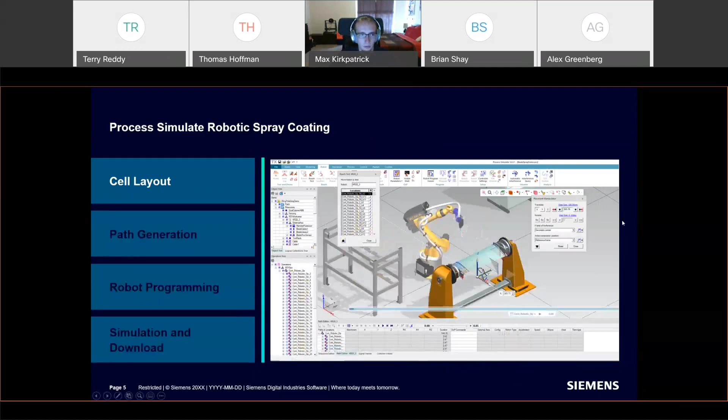First area I want to touch on is cell layout. This is mainly about determining where we should place our robot, our fixturing, how we should hold our work, and how do we determine that that's going to actually work the way we expect it to when we go to actually push this to the real cell.

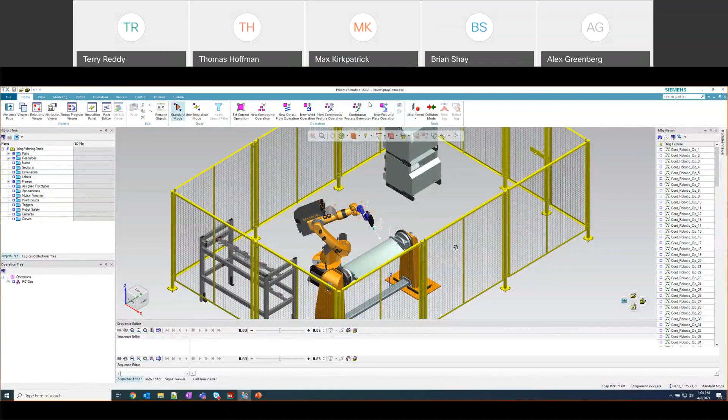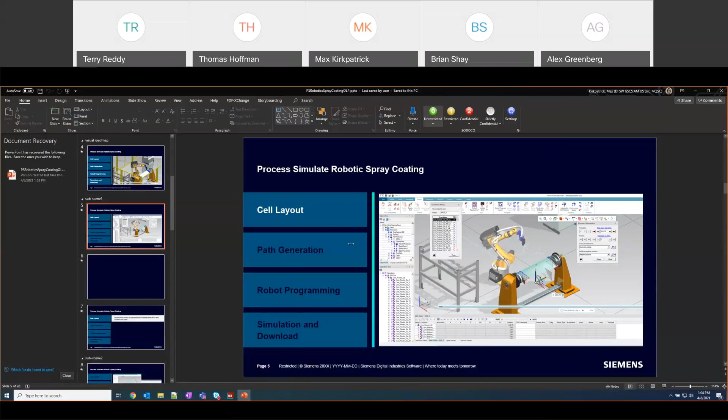So I'm going to jump into some live software here. This is the Siemens Process Simulate tool. See here. Having some technical difficulties here. It's rather slow. That's impressive. Twice in one day. That's okay. Just going to restart that real quick, and then I'll try to speed up here to see if we can't make up some of the lost time.

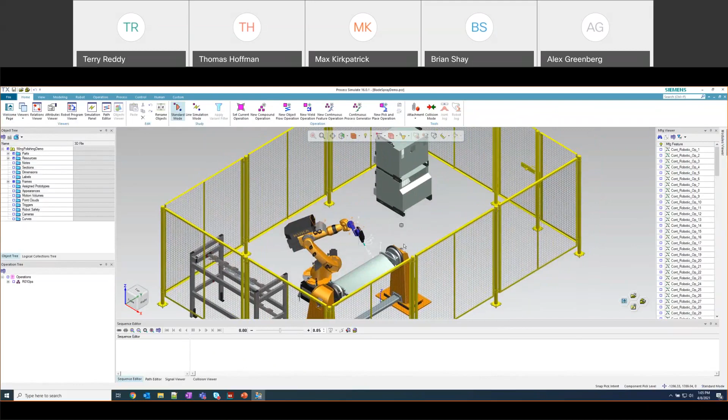Okay, so I'm just going to open back up the cell, and then we're going to get going again here. So first thing I wanted to talk about was cell layout. How do we determine where these fixtures and fencing and everything should be in the cell? One of the first things we can do is analyze how the robot is actually going to move around in the cell, using the inverse kinematics tools inside Process Simulate to understand how the robot will move in the space, how far it can physically reach if I start dragging around the end effector, and we can get a better understanding of what our robot reachability looks like at a certain height.

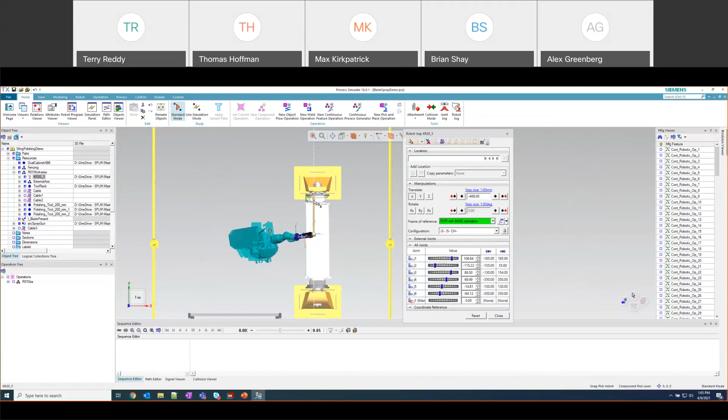But this is a sort of imprecise tool, so something else we might do is use what's called a reach test to do this. I could take a look at maybe this first pass of my spray coating application and the last pass, and then we can analyze whether or not these locations in these paths will be within reach of the robot. So I can take these two operations and then perform what's called a reach test.

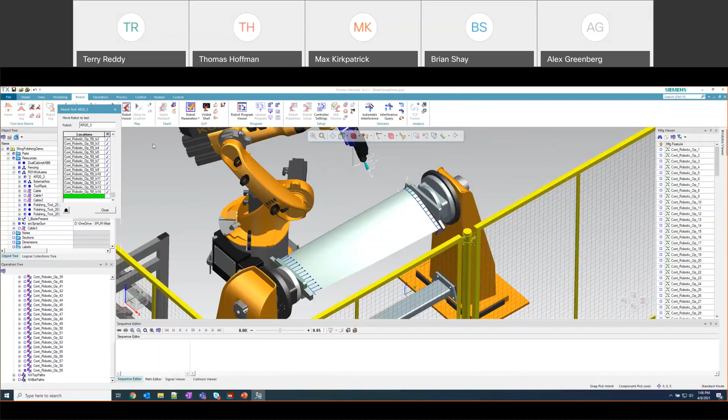So we'll do a reach test, and in its current location, the robot can reach all these targets. That's all well and good, because this is placed where we expected it to be.

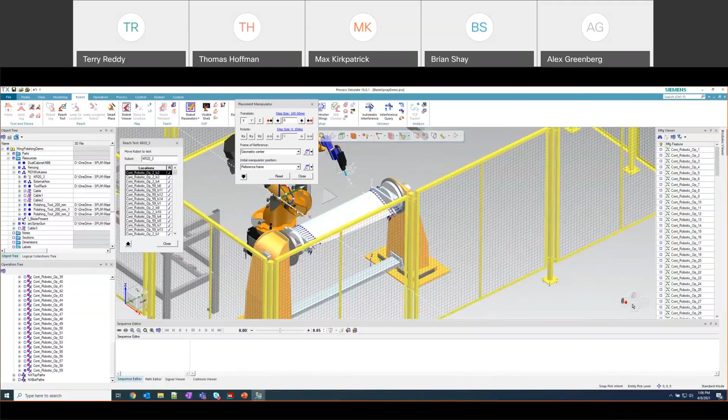If I go to try to move the robot while I'm doing a reach test, we'll see that the menu is actually interactive, and I can dynamically move the robot around. As I slide it farther and farther away from the fixture, the points turn from yellow to red, telling me that they no longer can be reached in the current position. This is because the robot physically can't get to that location.

This isn't taking into account the rotary positioner. So if we wanted to analyze whether rotating the positioner would still get us there, we could do the same thing. We could pull up this rotary positioner and rotate it to a new position. We go here, joint jog, move this to a new target, maybe something like this. And then we can do the same reach test and see if we can reach those targets now.

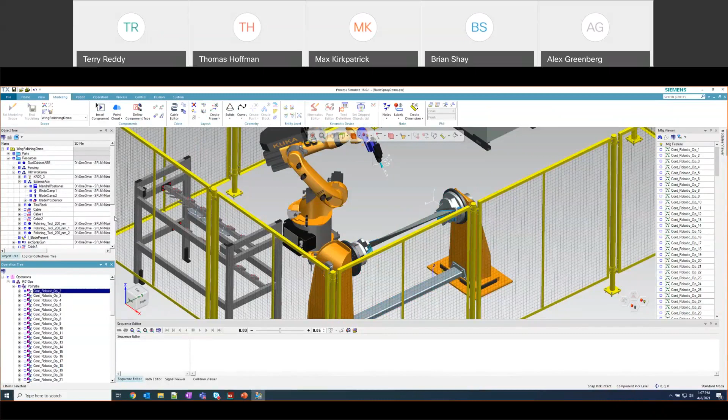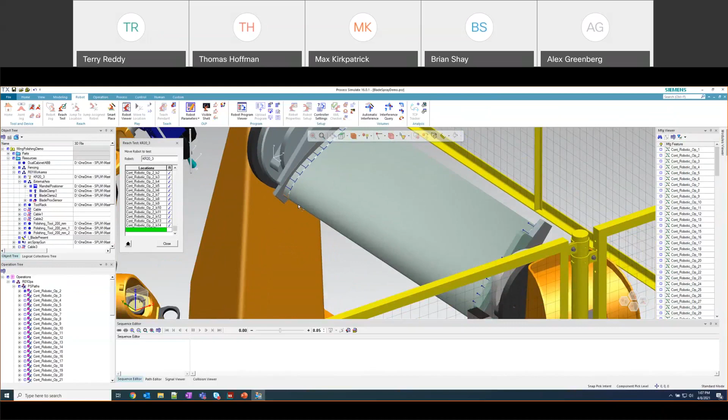In this position, looks like we can get everything except now we can't get the front leading edge of the blade—it's a helicopter blade. So these targets are out of reach. These yellow targets are ones where we can reach the Cartesian coordinates, but we can't reach them in the correct orientation. The reach test tool just allows us to move stuff around to figure out where it should actually be positioned so we won't have problems with our cell later down the line.

That said, I'm going to move this back to where it started, and we can move on to the next thing here in our presentation.

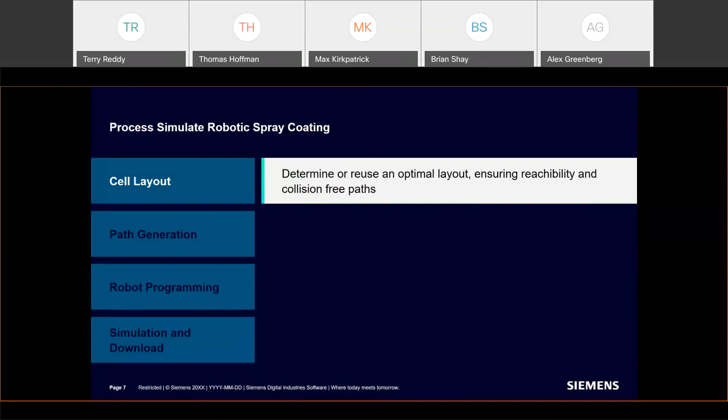So once we've done some reach testing and cell layout, we've moved around our components to wherever they need to be in the cell. When we feel pretty comfortable with our cell design, we'll move into path generation. So the idea with cell layout is determining, or potentially reusing an existing layout, to ensure reachability and collision-free paths. Next thing we'll look at is path generation.

There are two approaches we can take to path generation. One is using an external tool like Siemens NX or any other CAD package to generate the curves you want the robot to follow. Another is to generate those curves natively in Process Simulate. I'm going to show you both of those options here.

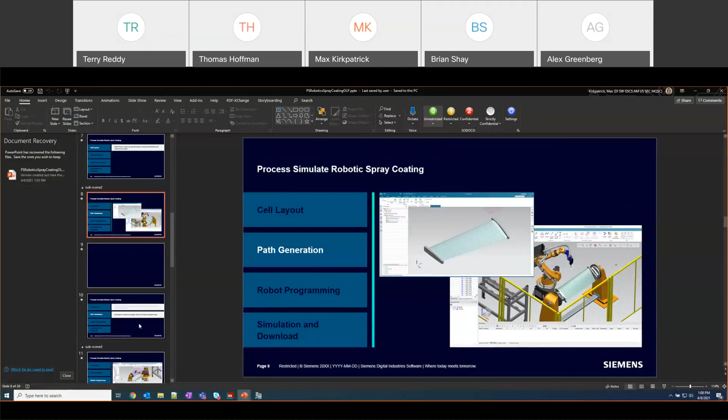So the first option I'm going to show you is generating the curves inside NX. I've got this same blade, and this time you can see I've got these curves that I want the robot to follow on the surface of my blade. Those were created by creating a sketch on an offset plane and then projecting these lines down onto the surface to generate my coverage pattern.

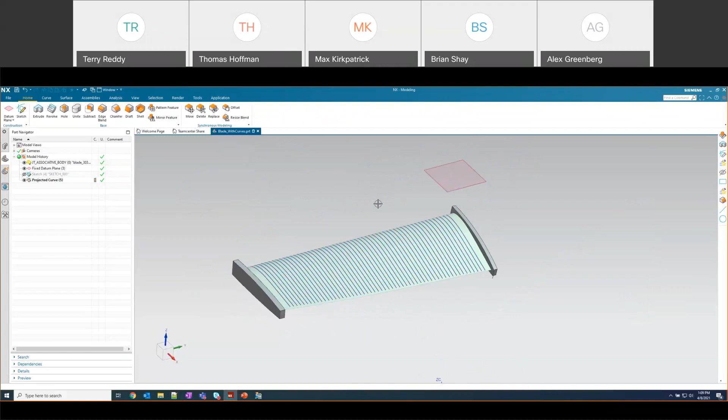There are certainly more sophisticated ways to do this. You could generate these using your favorite tool and CAD package and then load them into Process Simulate. Once we have a toolpath that we like, we can go to File, Export as a JT.

JT is the file format that Process Sim works with natively. When we export this, we're going to export it as a single file and make sure we're including wireframe. Wireframe entities are these lines themselves, and those will get loaded into Process Simulate.

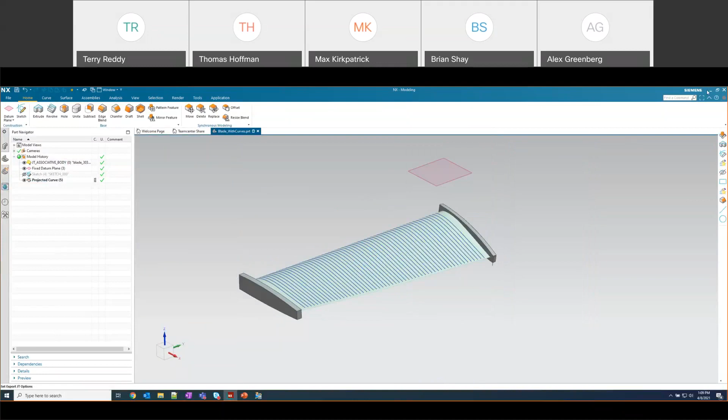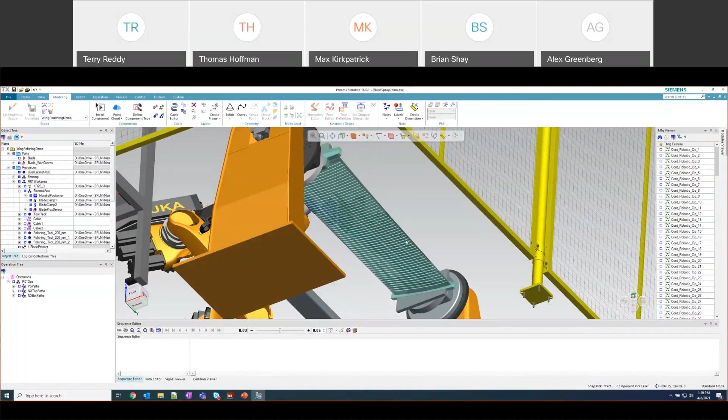Once we've exported from NX, we can actually see those appear inside Process Simulate. I'll switch over to a part where we've already done this. So here's the same part, but this time from NX with the curves on the surface. You can see they exist on both sides of the part, because when we projected onto the surface, we projected onto both sides. So this is the method of generating curves from NX.

Once we have these, we can use them as what's called manufacturing features inside Process Simulate. So I would use this tool here called Create Continuous Manufacturings from Curves. It asks me what curves I want to use, and I'm going to select my curves from inside my model. It auto populates these names, which are created inside NX, by the way.

So if you would like these to be a little more structured or easy to find later, you can name them as you want inside your CAD package. Make sure these are assigned to the correct part, and then we'll click OK. What's going to happen is Process Sim will generate a set of curves.

Someone can't hear me? Am I coming through fine here? Yeah, I think you're coming through fine.

So I've generated a set of curves inside Process Simulate. You can see they're over here in my manufacturing features. And now if I hide the original curves from the CAD model, we can actually see those all on top of the surface of the part inside the Process Sim model.

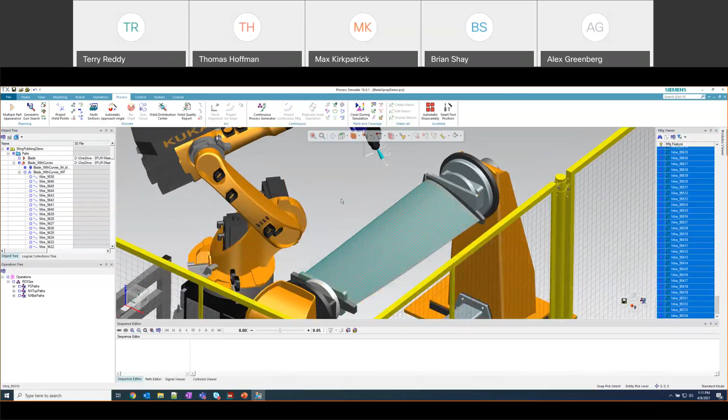These will be the actual paths, called manufacturing features, that the robot is going to follow when we run these. So from here, we create what's called a new continuous feature operation.

Select our robot. We can give it a name if we like, and then our tool and our scope. I'll click OK, and this creates our operation. This is like our container that's going to contain all of the paths that we want to trace.

Then in order to generate a path that the robot can follow, we have one last step, and that is to project this curve onto the surface. So we use project continuous manufacturing to grab the surface normals at each point. We're going to do tolerance-based spacing, giving us a maximum tolerance of, in this case, 0.05 millimeters. The robot will deviate no more than 0.05 millimeters from the path, and then we can project.

When we project, we're actually creating a robot toolpath that the robot will be able to execute. This takes just a couple seconds to run, and then we'll line up with all of our points on the surface for our robot to actually trace.

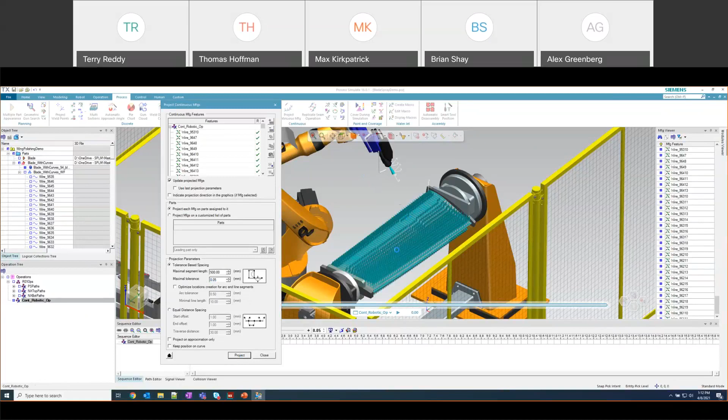Okay, so we can see the targets now inside Process Simulate. Each one of these points, each one of these frames here is a robot position, a robot target. We've generated our paths across the surface according to our projection parameters that we specified here.

Now we can do things like put our robot at the first position and see what the path would look like, right? We could take our very first operation in this path.

Actually grab this one and simulate just one pass. And so right now we're moving the robot without moving the table. It looks like for this first pass, that's going to be good enough.

But that might not necessarily be what we want to do. So we also can incorporate the rotary position limits. But before I do that, I want to show you the other way of generating a path inside Process Simulate.

So we've gotten to the point where we have an executable robot path using features from NX. The other option is to generate paths using curves inside Process Simulate. So I'm just going to hide all these features that we just created.

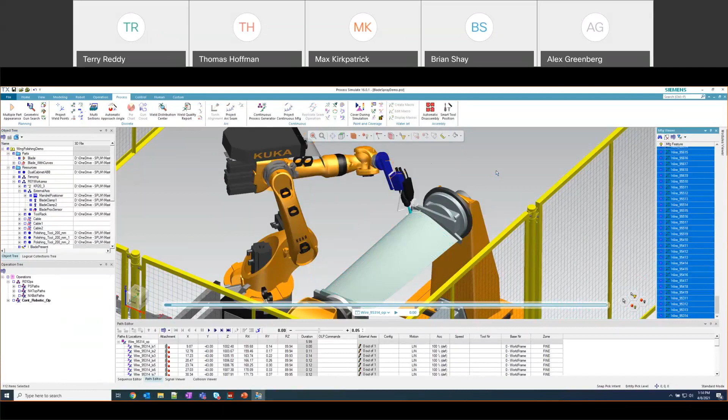So we're going to do this once more, but this time we're going to generate the curves from inside Process Simulate using the continuous process generator. I'm going to select my target face and a start point and an end point for my spline.

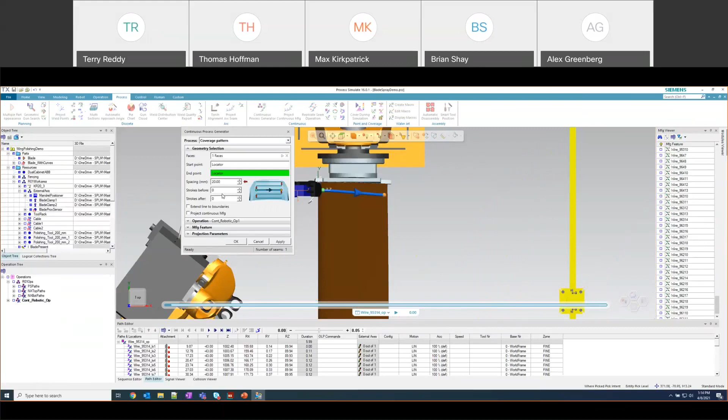So let's say I want to start here and I want to end here. This generates my first curve. We can take a look at this from the top direction. Maybe I want to move this a little bit so it's a little straighter.

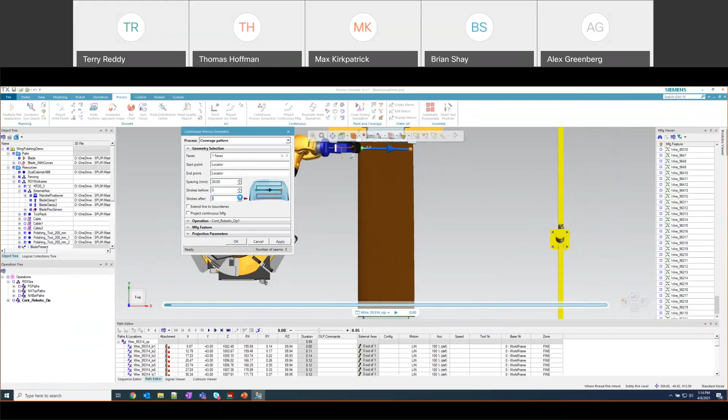Something like that. And now I can say what my spacing should be. I happen to know for this gun, I want a 20 millimeter spacing, and how many passes before and after this, right? So if I click here, I can generate more. Maybe I want 30 passes. It'll auto generate me 30 passes here.

So I'll just fill up this skin with the number of passes I want to get the coverage I need. I can specify what operation I want this in, and then I can click OK.

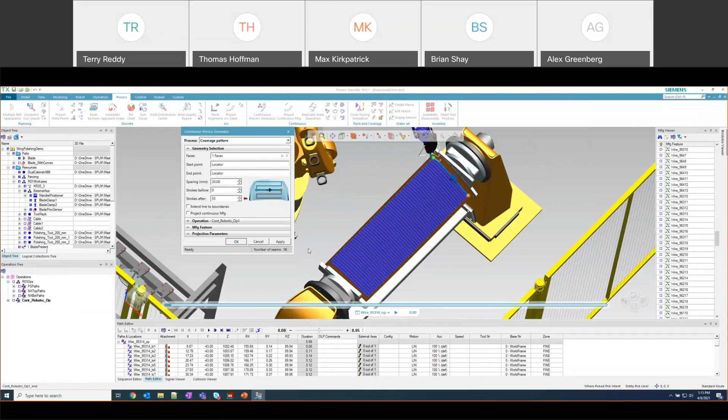And this will automatically generate those continuous manufacturing features that we were talking about before, except this time they're all native inside Process Simulate. From here, the process is exactly the same. I just project these points, and we wind up with, again, paths that we can follow on the surface of the skin.

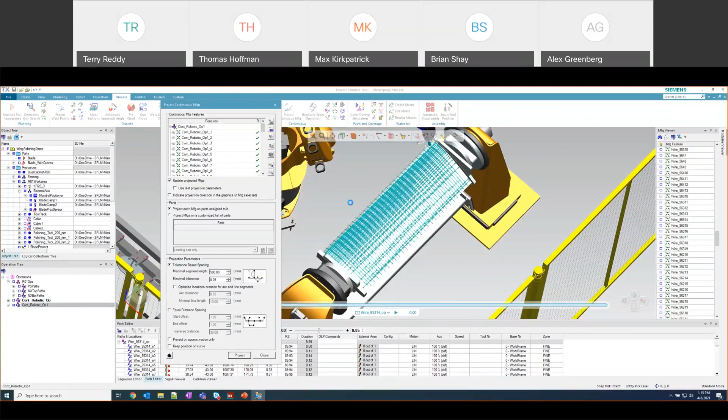So here we can see we're moving down and back, zigzagging the way across the part. And if we wanted to, we could take one of these paths and simulate this, like the first one here. Play it and look and see what our path would look like.

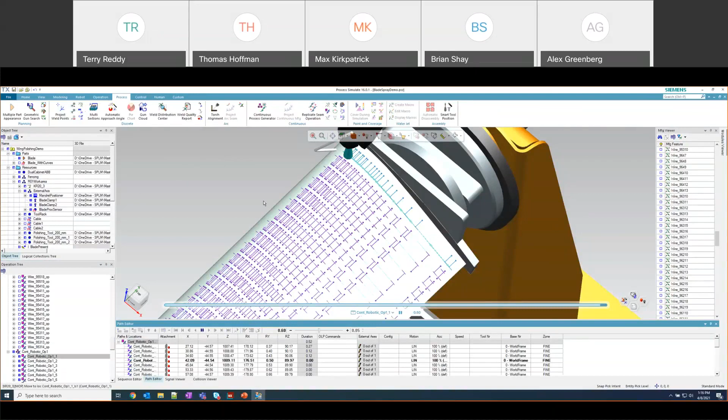So this is how we do path generation. The idea here is to generate or import coverage curves for robotic programming. Our next step is to actually perform the robotic programming and specify all the necessary parameters to create a program and download it to a robot.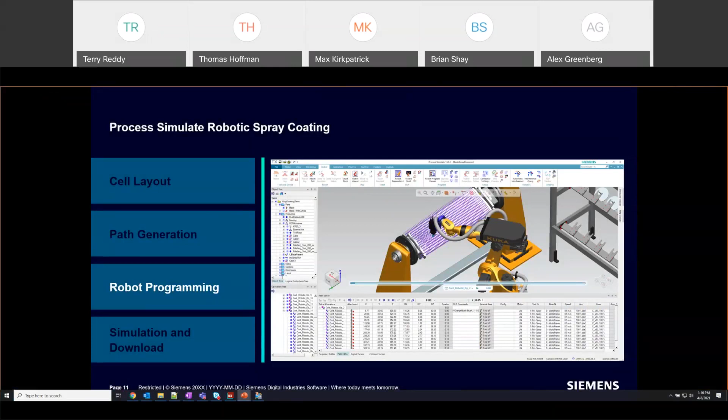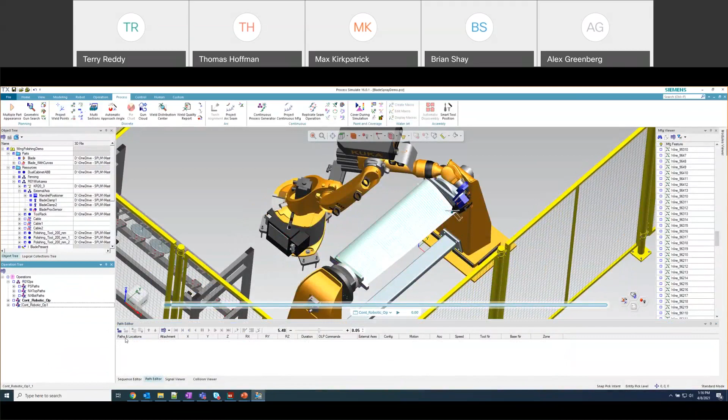I'm going to move back to a path where we've already done some of this, so I'll show it with this one. We've got our continuous robotic operation that we've created using the process inside Process Sim. I'll work with the one inside Process Sim since it's lighter weight with fewer points, so it should be easier for us. I'll load that up in my path editor. The path editor is where we specify all the necessary parameters in order to actually download this to a real robot. The very first thing we might want to do is have our positioner get influence.

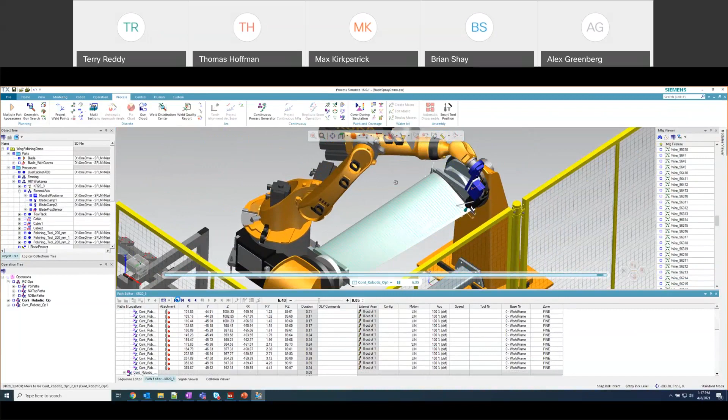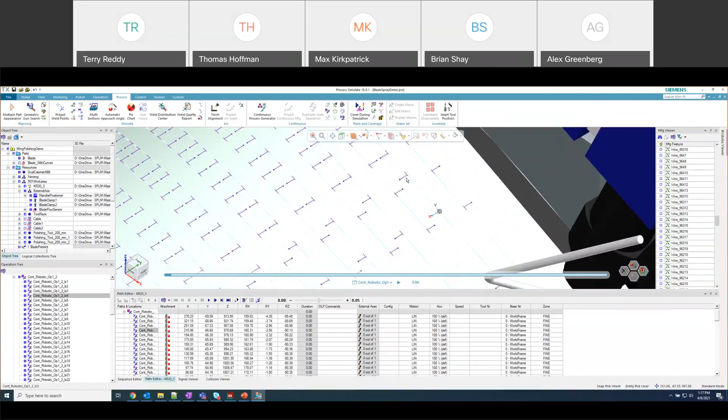Right now, we are just moving along these curves, but we aren't actually rotating the mandrel, the positioner, in any meaningful way with it. So a couple things: in order to incorporate that, first we need to make sure the orientations are all correct on each point. You'll notice some of these are flipped as we switch back and forth at each turn. So what I can do is just set all of these to match one orientation.

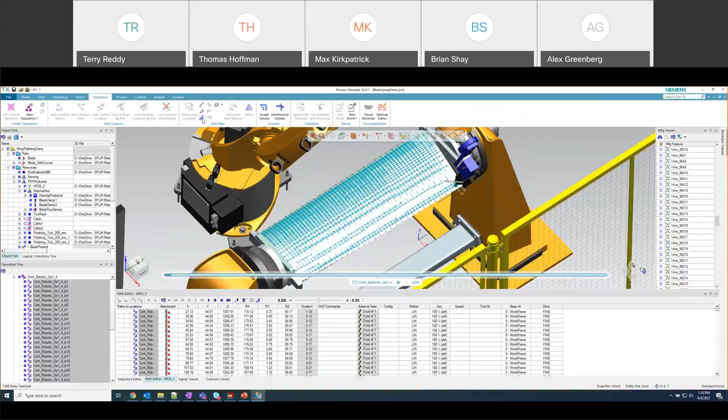So I'm going to select all of my points, and then I'm going to use a command called align locations. We're going to align all of these to just this first target. Say okay, and that'll flip all of these to match the right direction.

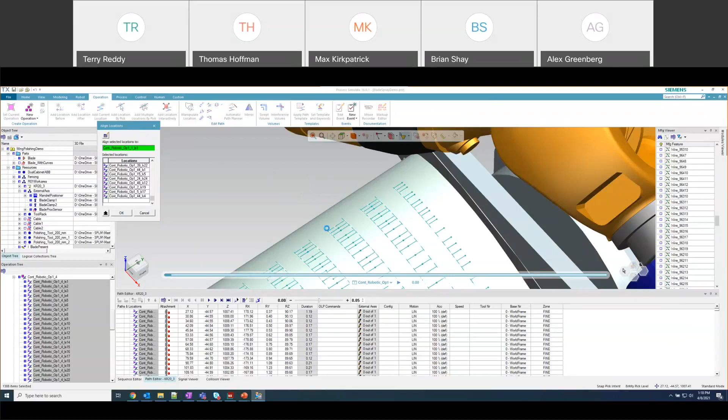Unless, of course, Process Sim decides to crash on me. Okay, I'm going to spin up another one while this goes. Do apologize for the technical difficulties here, guys.

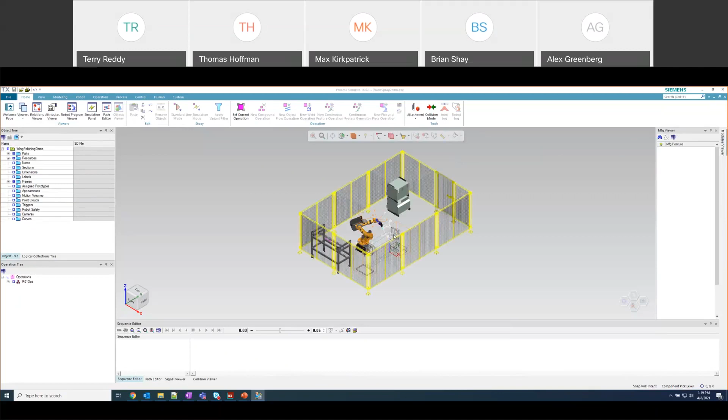What I'll do here is just jump ahead past the alignment step to show you the results. So once we have these paths aligned, we'll wind up with something that looks like this, where all of the orientation vectors are the same.

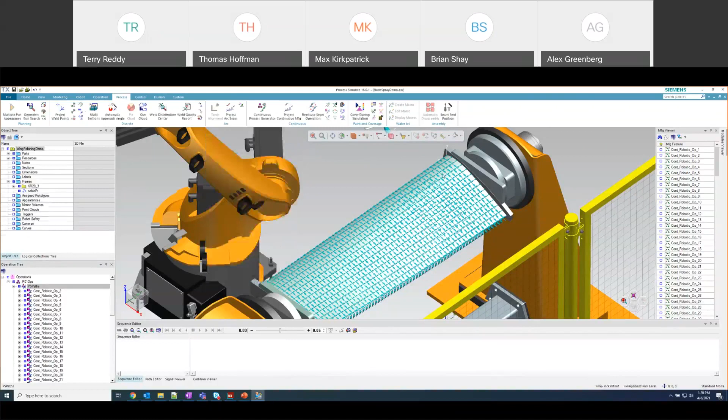What we do here is specify a target direction and a position. To specify the target direction, first I want to position my robot at the angle I would like it to hold. For instance, if I start at this position, this is the angle I'm asking my robot to hold for this path. So I'm going to rerun this positioner tool in this location, moving my robot to the starting location and making sure it's in a pose that is reasonable and would work for the entire path.

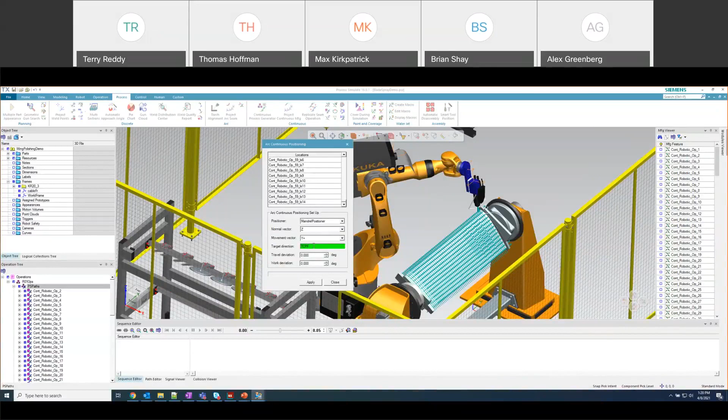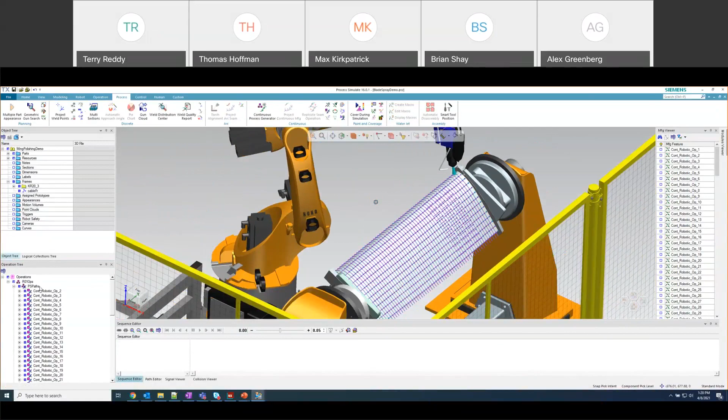Then I specify my target direction as the robot's current TCPF, that is this frame right here at the end of the arm. I make sure my positioner is selected and my normal and movement vectors are correct, and then I hit apply. It's going to automatically run through and calculate external axis angles for every target. Then I can play back the path and we can take a look at what this would actually look like.

And so now we see the positioner moving continuously as my robot arm swings back and forth across the part.

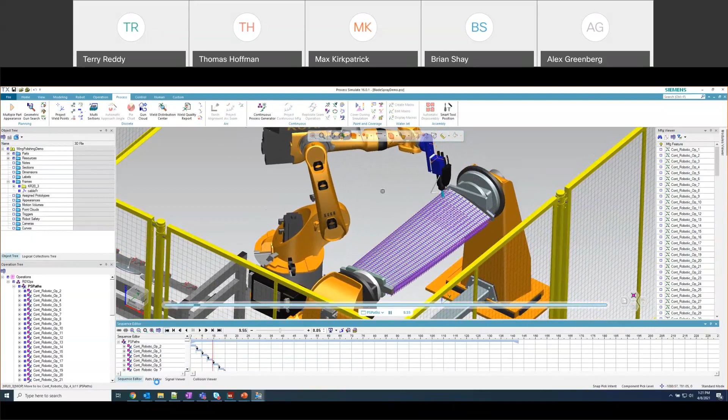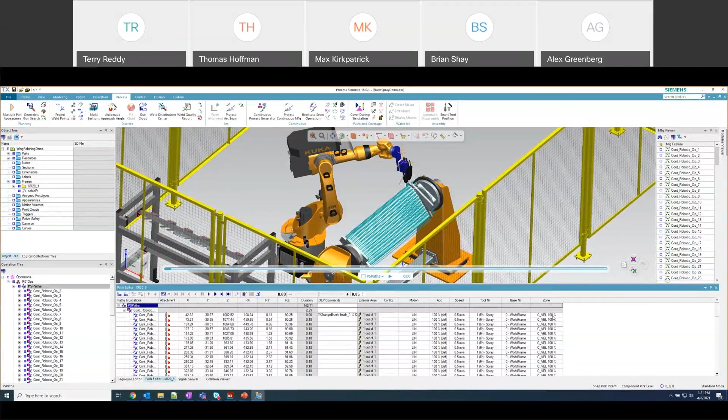There's a few other things we want to be able to specify here. We'll jump back into the path editor and I'll show you. In the case of this robot, a KUKA robot, we need to specify a tool and base frame. These would sometimes be called U-frame or U-tool on FANUC, or other terms, but they are the end of arm tool frame and the reference frame for all the coordinates. We also need to specify what's called a zone, as well as a motion type and speed. Once we have that set, we can actually create a robot program from the path we are simulating, and you can see in these paths, they've all already been set.

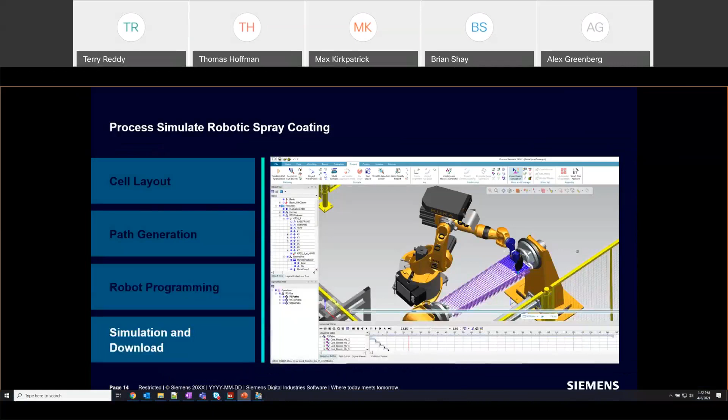So once we have simulated and we like our path, the only other thing we should do is take a look at coverage. This is the robot programming portion, where we create and refine robot programs based on our coverage pattern. Then finally, we need to actually simulate our coverage pattern, simulate what the spray pattern is going to look like, and download it to the actual robot.

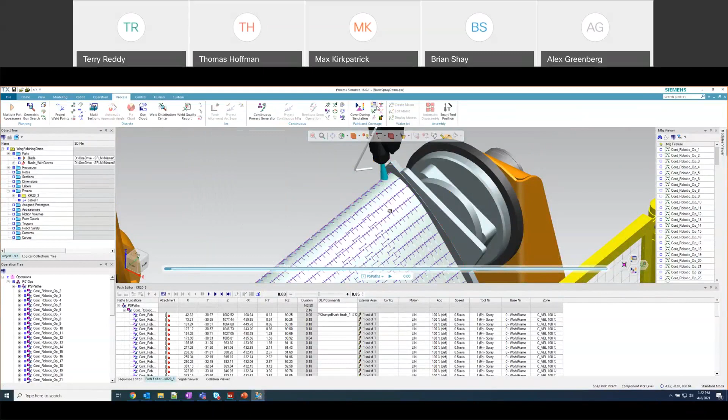So in order to simulate this coverage pattern, we first need to create a mesh on the surface of this part. I've already done this, so you can see there's a mesh defined on this part. I can actually show you what that mesh looks like. Here is the mesh on the surface of this part, all these tiny triangles. This is what we're using to determine what areas have gotten covered by spray and what areas haven't. So I'm going to hide that mesh again, just for performance reasons here.

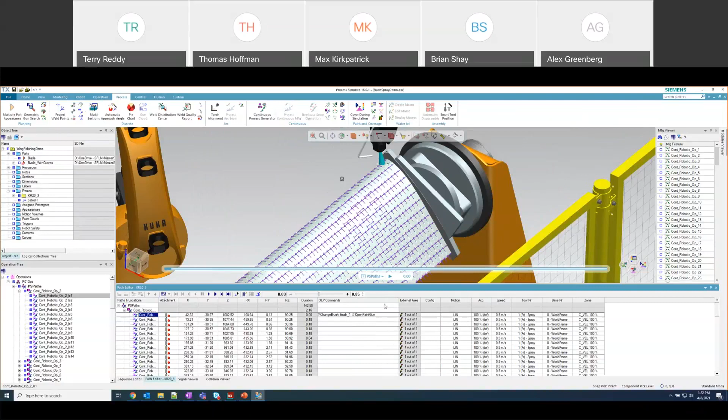And then inside our program, we specify that we want to turn on our spray brush at our very first location. So we set our brush and then we open the paint gun. And so now we can take a look at what the coverage would look like over the path. So turn on cover during simulation and play.

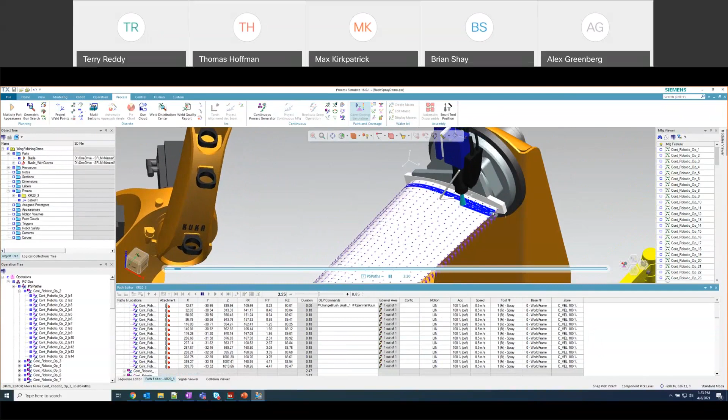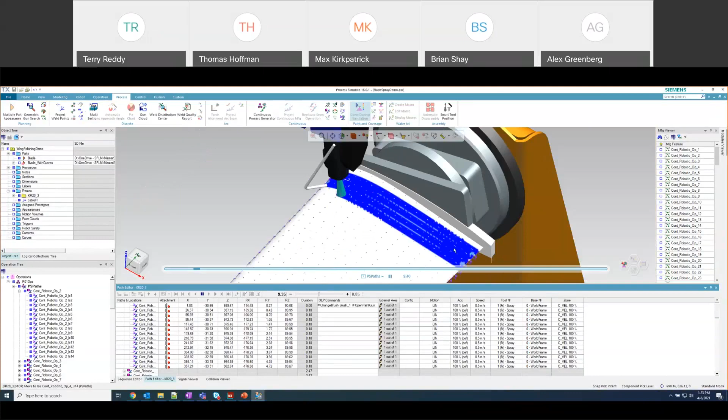And now we can watch our spray pattern appear on the surface of our part as we simulate. This gives us a better idea of what areas of the part are being covered, what areas are being covered twice, how even our spray is, whether the spacing is what we wanted, and what areas are getting missed. For instance, this little bit here got missed by those two paths, so we might have to add or adjust our path so we move a little bit farther outside the area of the wing.

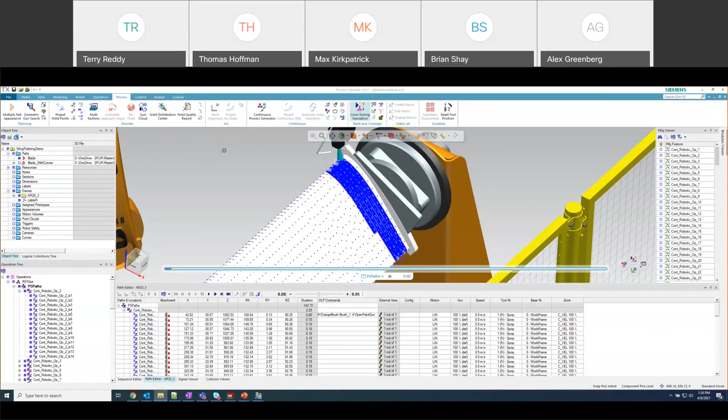Now, this simulation is a little bit slow, especially because we're running with all these points displayed and trying to do simulation with coverage in real time while sharing the screen. So I've got a pre-recorded video that shows you the result of that. I'm just going to pull that up real quick. You can take a look at what this would look like in real time. This is how fast the robot would actually be moving, as well as simulating the cables and the coverage here. This was captured inside Process Sim using the movie recorder functionality, which makes sure the simulation actually plays back in real time as opposed to in simulation time.

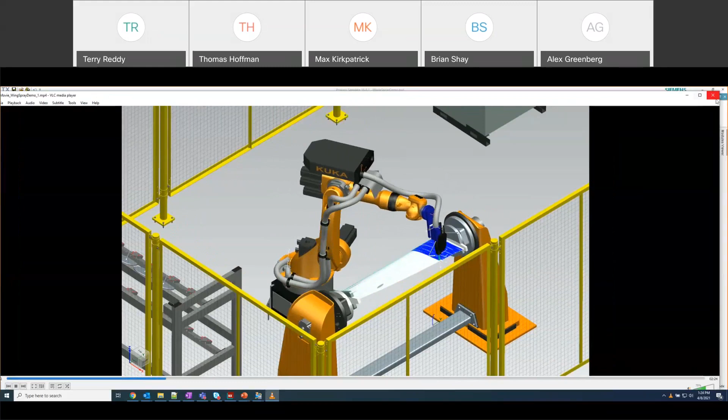Okay, so this is just to give you a sense of what this process would look like if we actually downloaded it. From here, all that's left to do is teach a configuration for each point, which we can do using the auto teach functionality. Then it'll select the solution for each point. You can see for KUKA, these are represented by these S and T characters. We do S2T34, and that would probably be the same for the entire path.

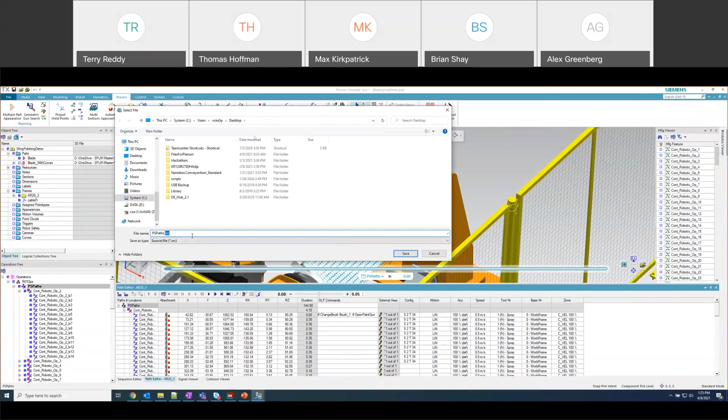Once the path has been taught, we can actually just right click on the path and do a download to robot, and it will generate a .src file in the case of this KUKA robot, or a robot program in the file format appropriate for whatever robot you're trying to program. I'm going to jump back over into the presentation here, but that is mostly what I have. So the idea, again, is simulation and download - we want to simulate our robot motion and spray patterns, and then finally post-process and run these on real equipment.

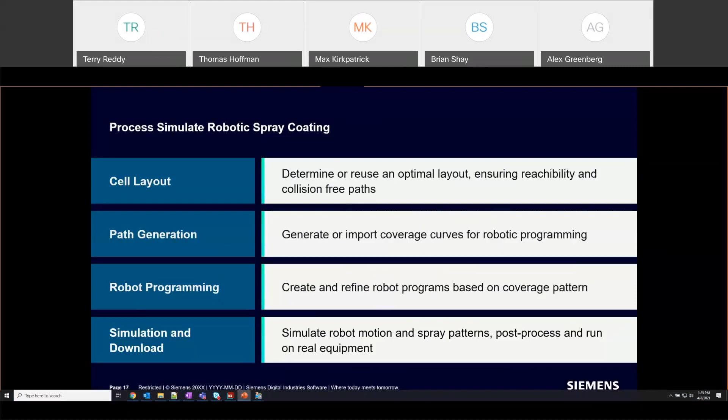Okay, so we've got a couple of minutes here. So Max, I had a question here.

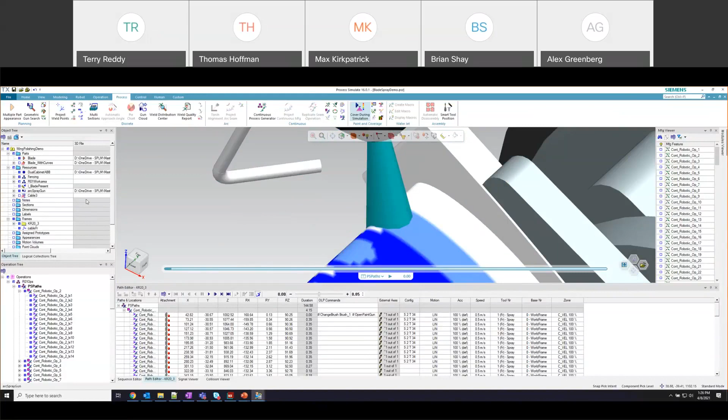Does this technique work depending on various brush spray heads, types and sizes, or is it dependent on a certain size of head? Absolutely, this is all adjustable. This cone I've selected here is just defined in CAD, but we could change it to be whatever size spray matches your particular parameters. This is a relatively small one because the process we were simulating is an additive spray process where those cones are very small. But in the case of a paint spray, that might be a much bigger brush. That's just defined by the geometry of the cone you specify, either with your CAD package, or maybe you'd figure that out by testing the component.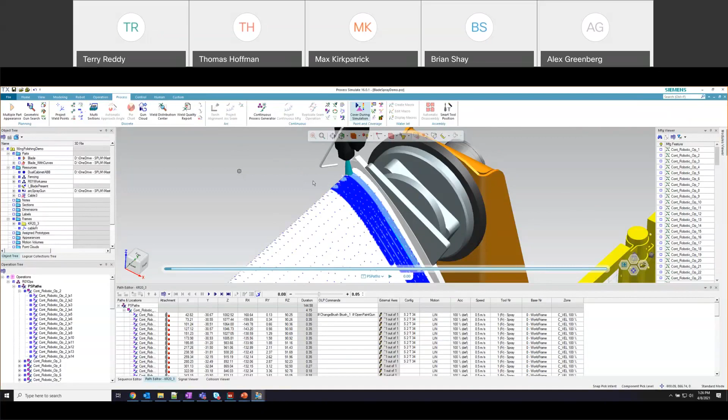Okay, we're getting some more questions coming in here. I think we've got a little bit of time. Sure, how about this one?

Is the simulation software compatible with other platforms such as FANUC and ABB? Absolutely, yep. We fully support FANUC and ABB programming. We have post processors for both of them, and we can interpret and download to those machines.

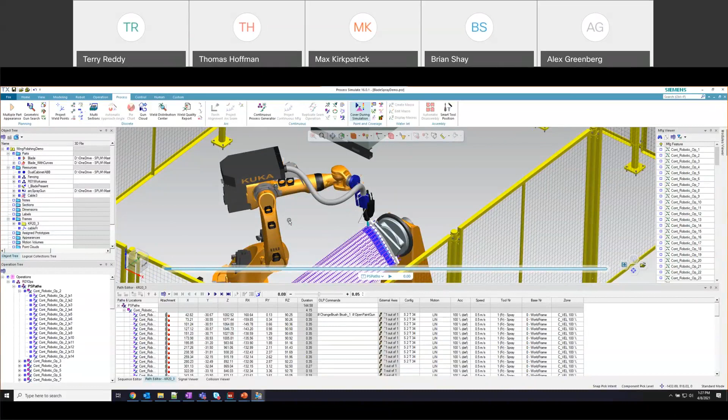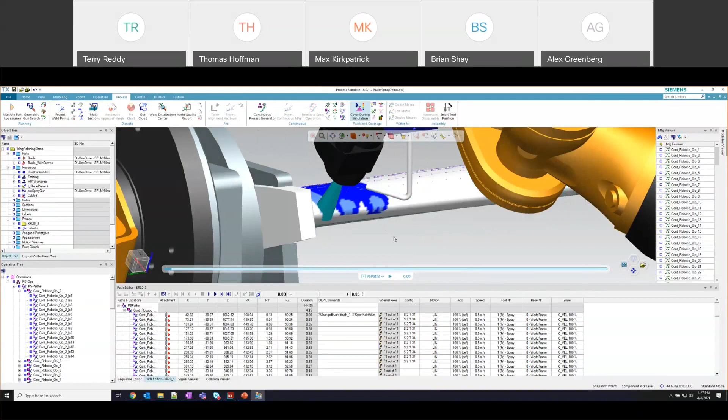How do you control the airfoil leading edge coating thickness? So here, where we're coating this leading edge, you see this simulation isn't doing the best job of it. We're actually getting overspray and underspray patterns at every cross path. One way we might control this is by having the airfoil complete a full rotation every time, as opposed to doubling back and forth. But as far as spray thickness, what we're doing inside Process Simulate is simulating the number of times a certain area has been covered by the spray head. We aren't actually simulating a material deposition process. So what we're seeing is the number of times this cone has passed a certain area on the wing or airfoil. The actual thickness you'll wind up with depends on the parameters of your spray nozzle and spray system.

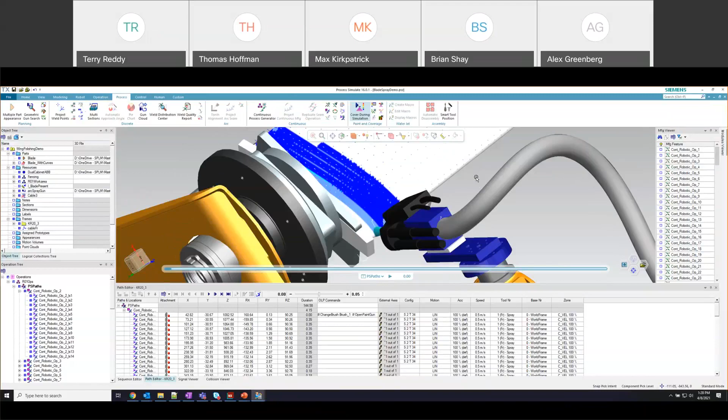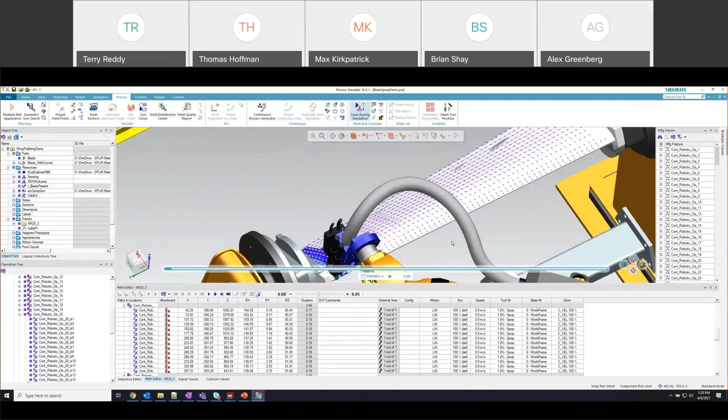Okay, let's see, we've got time for one more question. It says, for the example you have, how do you control the profile delta between the real part versus the design part? So if this surface wasn't quite what I thought it was, if I had an as-built part that was actually slightly different than my as-designed part. One solution is to use a 3D scan of the as-built part as your design part inside the simulation. The other thing we can do is, a lot of times the profile will be very similar, but the positioning may be different, so we can use U-frames, U-tools, or any number of offset calibration techniques to find the surface in the correct spot and base our spray on that. I've also worked on projects where we did a live reconstruction of the surface, but that's a bit more complicated. So this is mostly for programming a known surface.